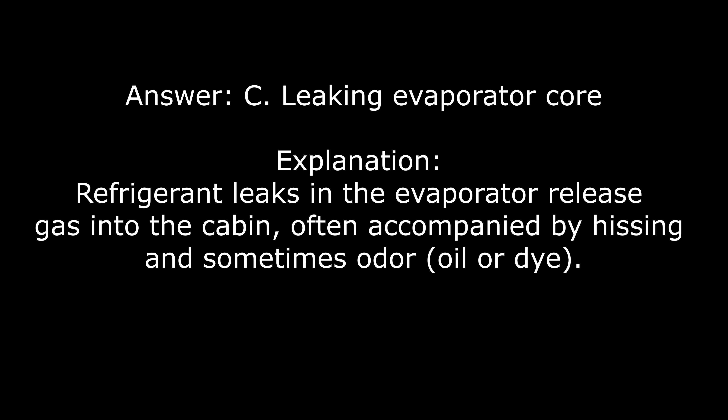5. A customer states that the AC makes a hissing noise inside the cabin near the dash. What is most likely? A. Expansion valve operation. B. Compressor clutch failure. C. Leaking evaporator core. D. Condenser restriction. Answer: C. Leaking evaporator core. Explanation: refrigerant leaks in the evaporator release gas into the cabin, often accompanied by hissing and sometimes odor, oil, or dye.

6. Which component removes heat from the passenger compartment? A. Evaporator. B. Condenser. C. Accumulator. D. Receiver dryer. Answer: A. Evaporator. Explanation: the evaporator absorbs heat from cabin air as refrigerant inside evaporates from liquid to vapor.

7. The accumulator is used in what type of system? A. TXV system. B. Orifice tube system. C. Electronic valve system. D. Any R134A system. Answer: B. Orifice tube system. Explanation: accumulators are used with fixed orifice systems to store excess refrigerant and prevent liquid slugging of the compressor.

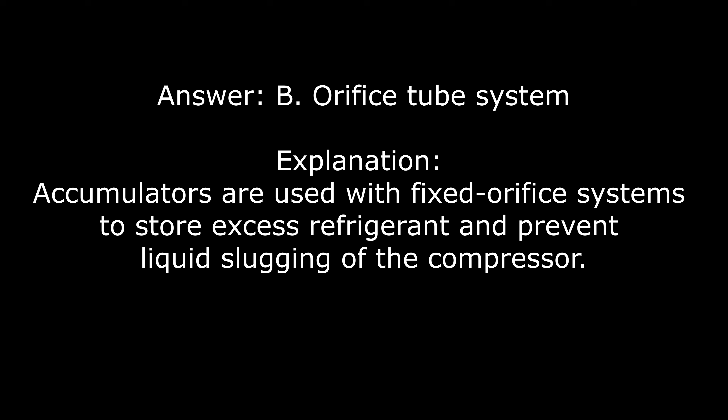8. Which refrigerant is used in most 1995 to 2016 vehicles? A. R12. B. R134A. C. R744. D. R1234YF. Answer: B. R134A. Explanation: R134A became the industry standard after the phase-out of R12 until being gradually replaced by R1234YF.

9. When using R1234YF, what is a safety concern? A. Toxic fumes. B. High-pressure explosion risk. C. Flammability. D. Frostbite. Answer: C. Flammability. Explanation: R1234YF is mildly flammable, classified as A2L. Technicians must use certified recovery equipment and handle carefully.

10. What is the purpose of PAG oil? A. Prevent compressor wear. B. Cool refrigerant. C. Absorb moisture. D. Neutralize acids. Answer: A. Prevent compressor wear. Explanation: PAG, polyalkylene glycol oil, circulates with refrigerant to lubricate the compressor and prevent wear.

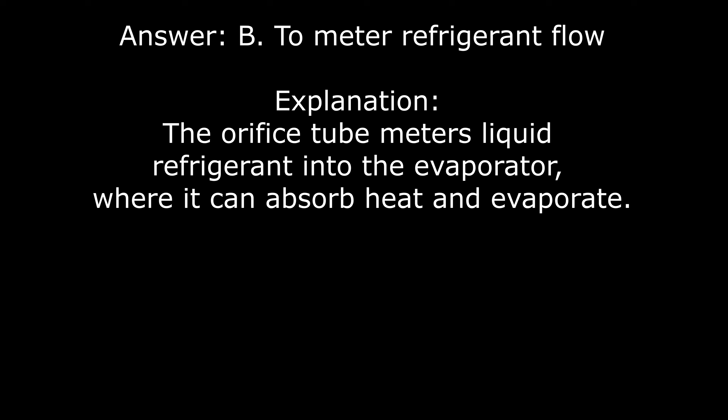17. What is most likely if the blower motor only works on high speed? A. Open clutch coil. B. Faulty blower resistor. C. Seized blower motor. D. Blown compressor fuse. Answer: B. Faulty blower resistor. Explanation: blower resistors control lower speeds. If the resistor fails, the motor will usually only work on the high-speed circuit.

18. Which sensor is often used to prevent evaporator icing? A. Pressure cycling switch. B. Ambient temperature sensor. C. Evaporator temperature sensor. D. High-pressure cutoff switch. Answer: C. Evaporator temperature sensor. Explanation: the evap temp sensor prevents freezing by cycling the compressor off if temperatures get too low.

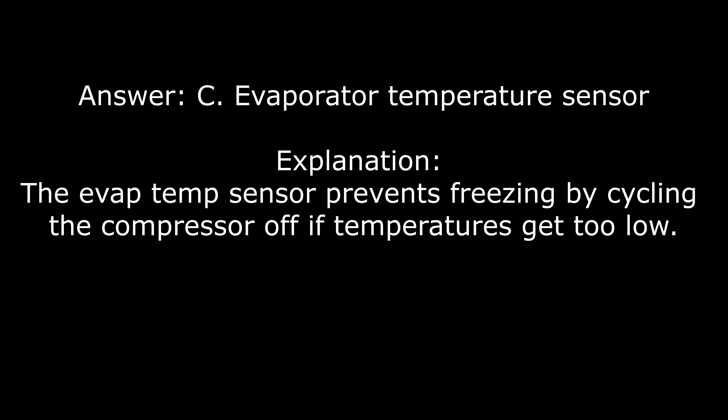19. Which component separates air temperature between driver and passenger in dual-zone systems? A. Heater core. B. Evaporator. C. Blend door actuator. D. Expansion valve. Answer: C. Blend door actuator. Explanation: blend doors, often electronically controlled, regulate airflow through heater and AC cores for dual-zone climate control.

20. What safety step must be done before disconnecting an AC line? A. Pull vacuum. B. Recover refrigerant. C. Add compressor oil. D. Open the TXV fully. Answer: B. Recover refrigerant. Explanation: federal law requires recovery of refrigerant using certified equipment before opening any part of the system.

21. A heater core is leaking. What is the most likely symptom? A. Refrigerant smell inside cabin. B. Wet passenger side carpet. C. AC only works at highway speeds. Or D. Clicking blend door. Answer: B. Wet passenger side carpet. Explanation: a leaking heater core allows coolant into the HVAC case, often showing up as damp carpet and sweet-smelling vapor.

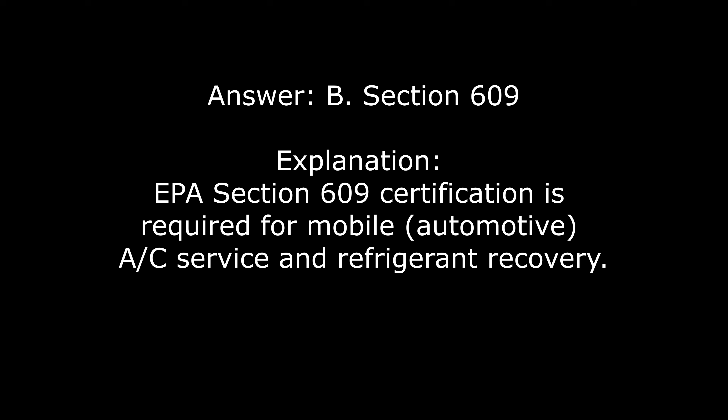25. Which EPA certification is required for servicing automotive AC? A. Section 608 Type 2. B. Section 609. C. Section 608 Universal. Or D. Section 410. Answer: B. Section 609. Explanation: EPA Section 609 certification is required for mobile or automotive AC service and refrigerant recovery.

26. A vehicle's AC cycles rapidly between on and off. What is most likely? A. Overcharged system. B. Low refrigerant charge. C. Stuck blend door. D. Seized condenser fan. Answer: B. Low refrigerant charge. Explanation: low charge reduces suction pressure quickly, causing the low-pressure switch to cycle the compressor rapidly.

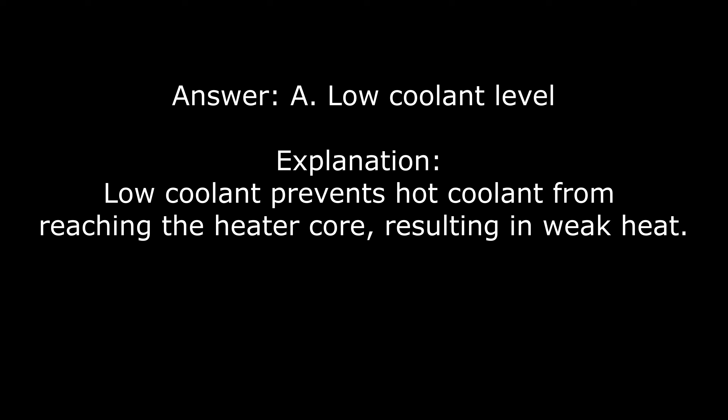27. A weak heater output is most likely caused by A. Low coolant level. B. Restricted TXV. C. Defective condenser. D. Overcharged AC. Answer: A. Low coolant level. Explanation: low coolant prevents hot coolant from reaching the heater core, resulting in weak heat.

28. When replacing a compressor, what else must be done? A. Replace cabin filter. B. Drain and add correct oil amount. C. Replace blower motor. D. Flush heater core. Answer: B. Drain and add correct oil amount. Explanation: compressors must be charged with the correct type and amount of refrigerant oil for proper lubrication.

29. What does a cabin air temperature sensor do? A. Measures outside air temp. B. Controls blend door position. C. Provides feedback to control head. D. Both B and C. Answer: D. Both B and C. Explanation: cabin sensors provide temperature data to the HVAC control module, which adjusts blend doors and compressor operation.

30. What is most likely if the clutch engages but the compressor does not build pressure? A. Defective TXV. B. Broken compressor shaft. C. Weak condenser fan. D. Blocked cabin filter. Answer: B. Broken compressor shaft. Explanation: a clutch may engage, but if the compressor shaft is broken internally, no pumping occurs and no pressure builds.

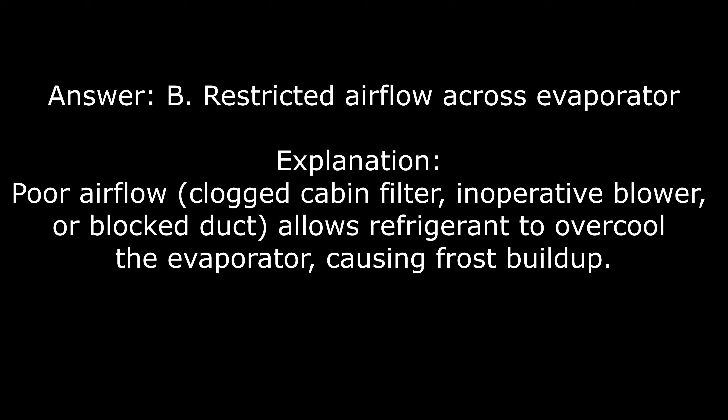31. What is most likely if the AC lines near the evaporator are frosting over? A. Overcharged system. B. Restricted airflow across evaporator. C. Weak condenser fan. D. Low blower resistor. Answer: B. Restricted airflow across evaporator. Explanation: poor airflow, clogged cabin filter, inoperative blower, or blocked duct allows refrigerant to overcool the evaporator, causing frost buildup.

32. What is the purpose of the accumulator? A. Store liquid refrigerant and protect compressor. B. Meter refrigerant flow. C. Remove heat from refrigerant vapor. D. Control heater core temperature. Answer: A. Store liquid refrigerant and protect compressor. Explanation: the accumulator stores liquid refrigerant in orifice tube systems, ensuring only vapor returns to the compressor.

33. A refrigerant leak is suspected in the evaporator. What is the best detection method? A. Electronic leak detector at dash vents. B. Soap bubble solution. C. Visual inspection of condenser. D. Manifold gauge pressure test. Answer: A. Electronic leak detector at dash vents. Explanation: sniffing near dash vents with an electronic detector is effective for locating evaporator leaks hidden in the HVAC case.

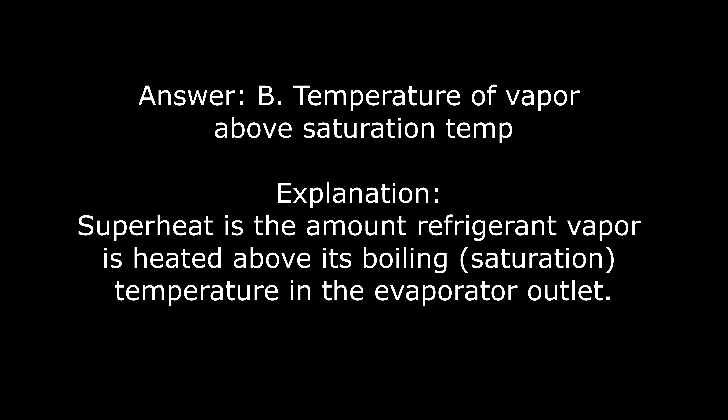34. Which of the following best describes superheat? A. Refrigerant below freezing point. B. Temperature of vapor above saturation temp. C. Pressure drop across TXV. D. Heat absorbed in condenser. Answer: B. Temperature of vapor above saturation temp. Explanation: superheat is the amount refrigerant vapor is heated above its boiling, saturation, temperature in the evaporator outlet.

35. A vehicle has poor cooling. Gauges show high low-side pressure and low high-side pressure. What is most likely? A. TXV stuck closed. B. Weak compressor. C. Overcharged system. D. Restricted condenser. Answer: B. Weak compressor. Explanation: a worn compressor cannot maintain pressure differential, leading to equalized low and high pressures.

36. What is the function of the high-pressure cutout switch? A. Protect evaporator from freezing. B. Prevent excessive system pressures. C. Maintain blower speed. D. Control heater temperature. Answer: B. Prevent excessive system pressures. Explanation: the high-pressure cutout switch opens the clutch circuit if pressure exceeds safe limits, protecting hoses and the compressor.

37. Why is nitrogen used when leak testing? A. It is flammable. B. It mixes with refrigerant. C. It is inert and dry. D. It reacts with dye. Answer: C. It is inert and dry. Explanation: nitrogen is safe, dry, and does not react with refrigerants or oils, making it ideal for leak testing.

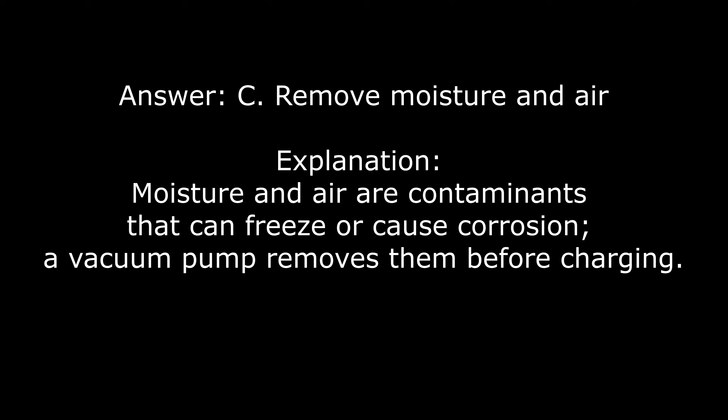43. What is the purpose of a vacuum pump in AC service? A. To pressurize refrigerant. B. To add oil to system. C. To remove moisture and air. D. To test compressor valves. Answer: C. To remove moisture and air. Explanation: moisture and air are contaminants that can freeze or cause corrosion. A vacuum pump removes them before charging.

44. Which of the following is a symptom of an overcharged AC system? A. High side and low side both high. B. Low low side, high high side. C. Both sides low. D. Rapid clutch cycling. Answer: A. High side and low side both high. Explanation: too much refrigerant raises system pressures and reduces cooling performance.

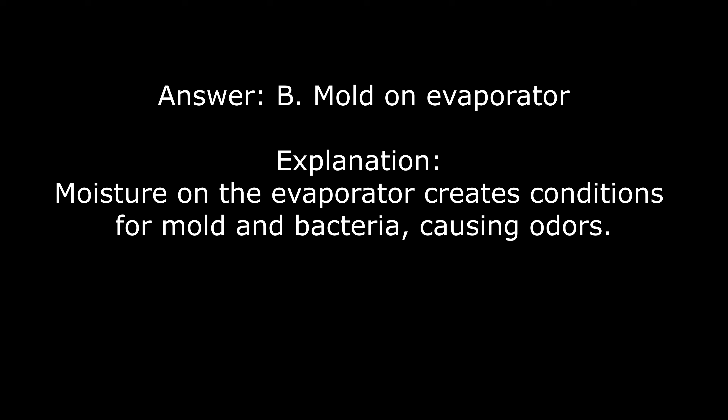45. A customer complains of musty odors from the vents. What is the most likely cause? A. Heater core restriction. B. Mold on evaporator. C. Refrigerant leak. D. Weak blower motor. Answer: B. Mold on evaporator. Explanation: moisture on the evaporator creates conditions for mold and bacteria, causing odors.

46. A TXV system is restricted. What will gauge readings show? A. Low low side, high high side. B. Both sides high. C. Both sides low. D. High low side, low high side. The answer is A. Low low side, high high side. Explanation: a restricted valve limits refrigerant flow, starving the evaporator and causing low suction and high discharge pressures.

47. When should O-rings be lubricated during installation? A. Only for high side fittings. B. Never. C. Always with refrigerant oil. D. Only with water. The answer is C. Always with refrigerant oil. Explanation: proper lubrication prevents tearing, ensures sealing, and extends O-ring life.

48. Which of the following is true about R1234yf compared to R134a? A. It requires the same recovery equipment. B. It is non-flammable. C. It uses different fittings to prevent mixing. D. It operates at lower pressures. The answer is C. It uses different fittings to prevent mixing. Explanation: R1234yf fittings are unique to prevent accidental cross-contamination with R134a systems.